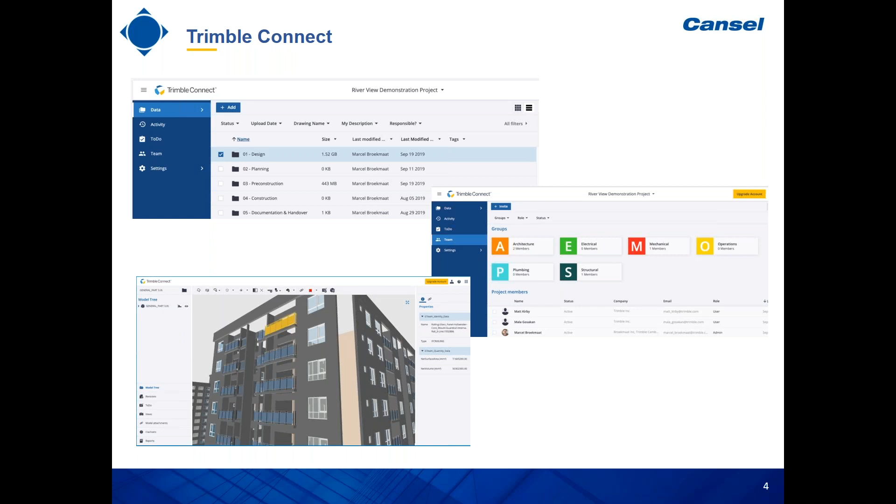As I said, the first time you head to that website, to connect.trimble.com, you'll start registering. You'll have to create a Trimble ID - again, this is all free. Once you create a Trimble ID, you'll be able to create what we call a Trimble Connect personal account, and this is totally free.

This is totally free, so you'll be limited to one project, limited to 10 gigabytes of storage, and limited to 5 collaborators. But that being said, anybody will be able to go online and share some data from that project, as long as you respect those conditions, and this will be totally free.

If you want to extend that and have a larger scope, and be able to manage several projects, then you'll need a business account - what we call a Trimble Connect business account. This business account comes free, or comes with your Trimble Access license that comes when you buy a data collector with us.

Or if you renew your extended warranty on your data collector - so if you have a TSC3 running Trimble Access and you have an extended warranty, you automatically are eligible for a business account. And same if you bought the brand new TSC7 with Trimble Access, it comes with a 1-year warranty, and by default you'll be allowed a business account within Trimble Connect.

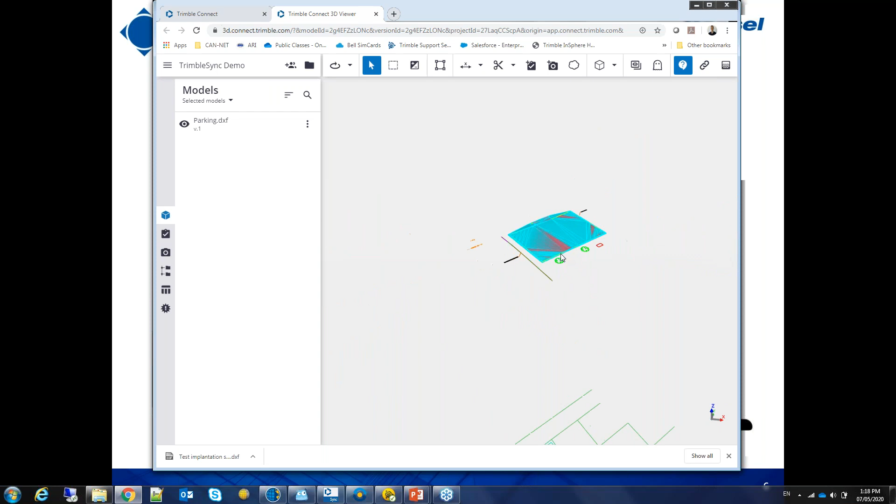All right, so as you can see here, I'm in the 3D viewer, and I can already see that the DXF contains some kind of surface. There's some line work, and if you're familiar with field data, you can already see that there seems to be some 3D data with elevation and some data that's flat at zero. So it already lets you, before even setting foot on the field, know that this might be a problem.

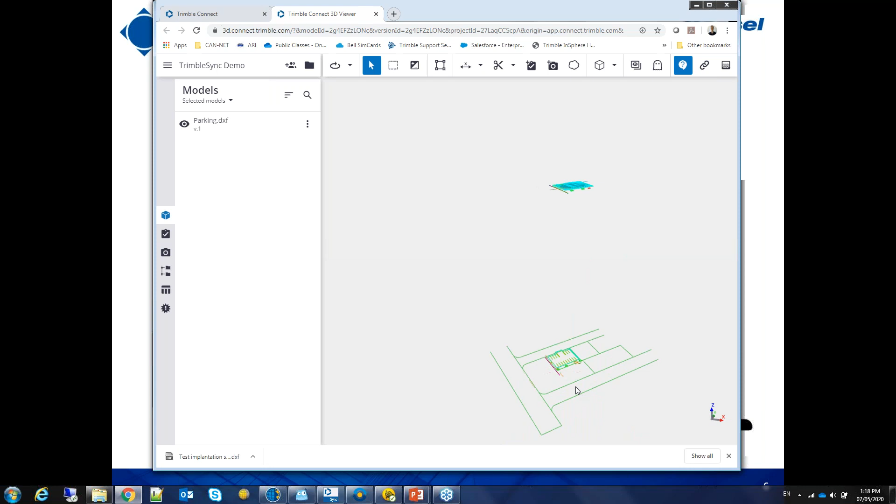So if this is important for you, you can already know that maybe you'll have to add some elevation at the design level before you head to the field to get a real 3D model. But this is just an example of what you can do from the web.

All right, so let's jump back to our main Trimble Connect project. The other thing I wanted to let you know is that the two applications I talked about, Trimble Connect Sync and Trimble Sync Manager, are available from here if you click on the application button. You'll have the application page where you can download the Trimble Connect Sync application and the latest version of Trimble Sync Manager right from the website.

All right. So as I said, when you're going to use the TSC3, we'll likely use the Trimble Connect Sync. It's on my computer, so I'll jump right into it.

So the Trimble Connect Sync is what you see here. The application is installed on my laptop, and when I open it, I can already see the series of projects that's been shared with me.

And then from there, you can decide if you want to synchronize data, and you can also configure the scheduling of the synchronization. In this case, this project is set to synchronize every 15 minutes.

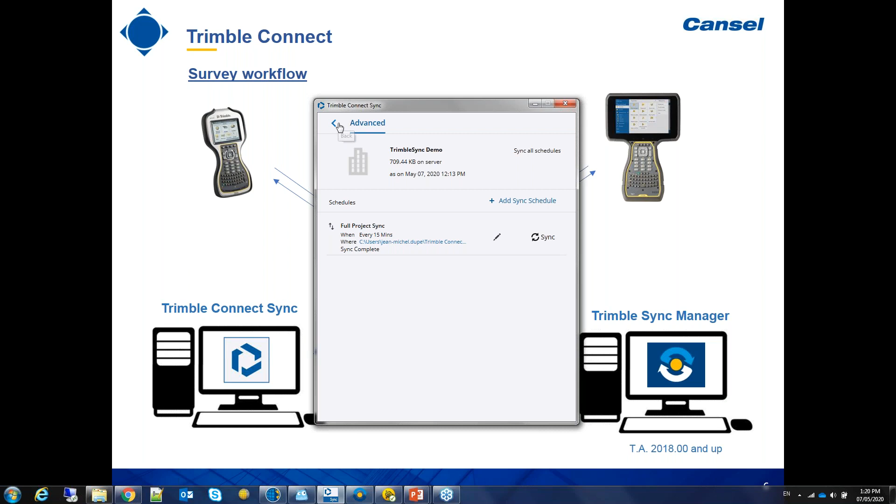As I said, this is only the configuration panel. Most of this will simply happen in a folder. When you install that application on your computer, it creates a new folder in your folder tree, and from there you can access your projects, obviously with your username.

You can look at your different projects that have been synchronized with you. So if I double-click on my projects, I see all the projects I'm part of that have been allowed access to.

And remember, we were interested in the Trimble Sync demo project. So if I double-click on it, I can see that the data I saw online is also synchronized on my computer.

And if I want to add any more data to it, I can simply drag and drop or copy paste it from anywhere on my computer. I can just come here and paste the data that I want to upload to my data collector. So it's as easy as this.

So you can do a shortcut to your desktop, and then when you need to add data to the cloud, you just click on your shortcut, come here, grab the data, and put it in the proper projects. Depending on the synchronization schedule that you've established, it's going to be sent to the cloud. You can also manually synchronize—if you want things to go faster, add some new data, simply press sync on your app button, and it's going to automatically synchronize to the cloud.

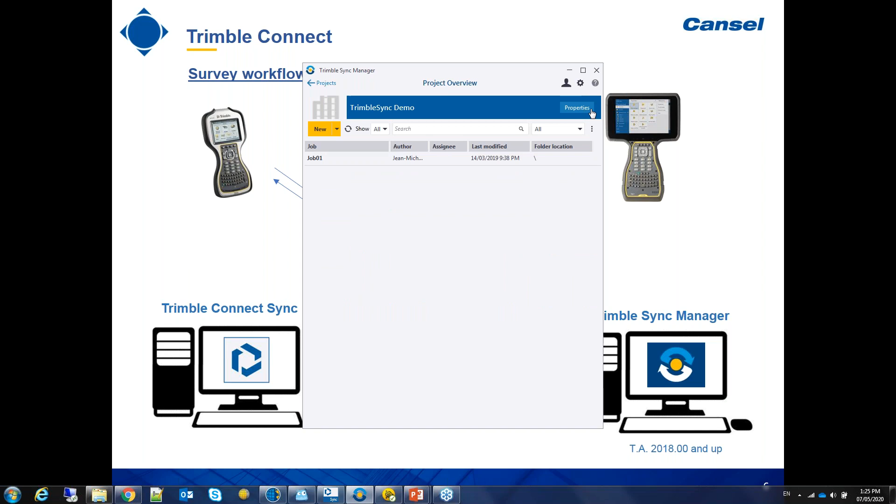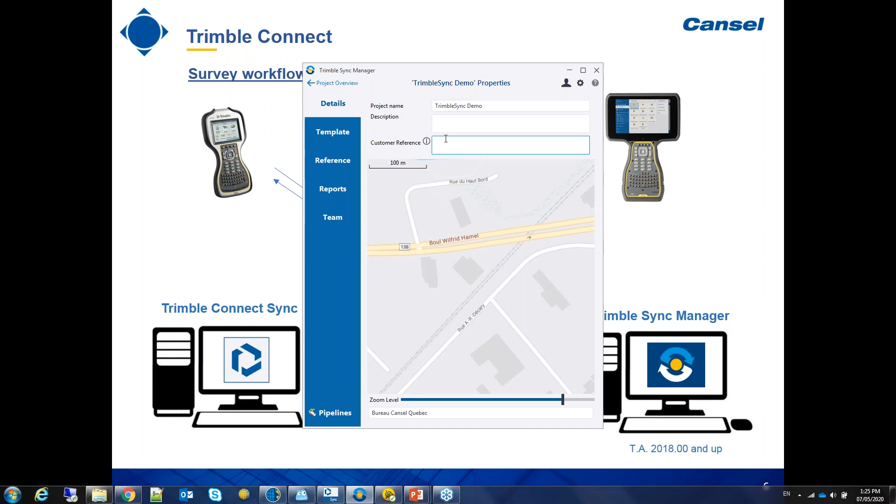So again, if you go back to the project layer, you can see the different projects that are part of your account. We're going to concentrate on the Trimble Sync demo. You can head to the properties of your project, and decide straight from this app. Remember, the Trimble Sync Manager offers a little bit more configuration options—you can manage your team, and also manage the details of your job right from the Trimble Sync Manager app. Basically, you'll configure the different reports you might be using for this project, decide who is able to contribute to it, and then from there, you can simply create a new job.

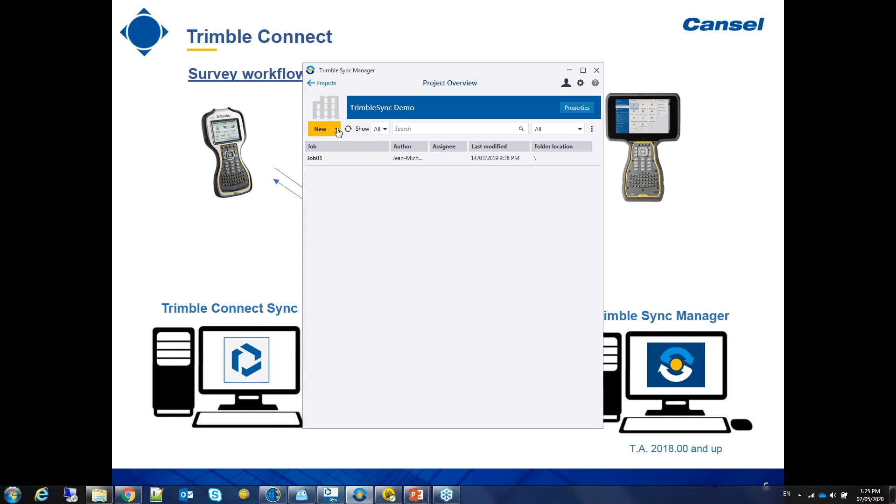So I can create a job, and you see that you can already choose the coordinate system for this job, so you have a lot more control. Basically somebody sitting at the office could configure everything for the field, and the field people simply have to open up that job and go right away with it. They don't have to do any configuration or anything—it was all done at the office.

Then you see that the project files—so I could add some job files or some project files. The job files are only for that job, and the project files might be used for anything else, right?

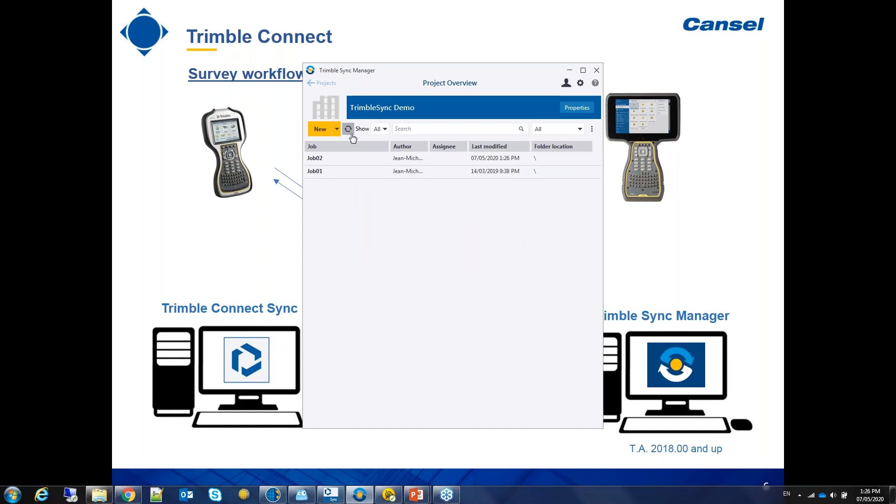So if I create this job, job 02, I'm going to synchronize this. I could assign it, this time, to my Trimble TSC7 right here. Then when you're in your TSC7, you see that you have the little Trimble Connect icon, so make sure that you're connected to it, using whatever credentials you have for Trimble Connect.

Then you can refresh to see what's on the cloud. As I refresh the screen, I already see that for my project Trimble Sync Demo, you can see the available jobs, and job 02 that just appeared because it just got synchronized. So I can open my project, and you see that job 02 is kind of grayed out, with a little cloud next to it, which means you have to download it.

If you want to download it, you simply press the little button, three dots here, you download it, and then you'll be able to download the job and all the files that come with it. When you click on that job, you can open it and work on that job.

So that's basically it. Once you're done, I can key in a node, or key in a point maybe, with some random coordinate, and then go back to my job level and say that this is done, so I can upload it back to the cloud.